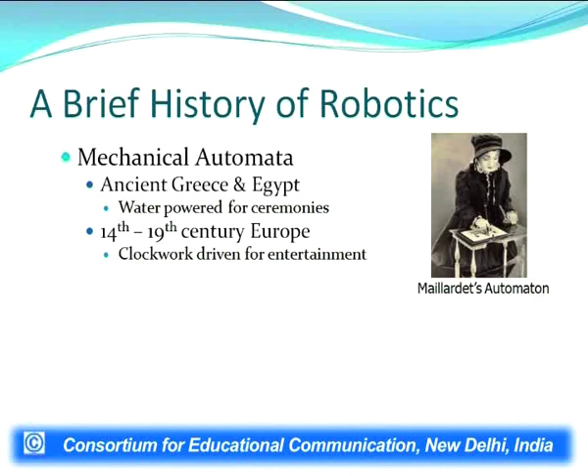Now let us start with a brief history of robotics. Mechanical automata in ancient Greece and Egypt, water powered, for ceremonies. From the 14th to 19th century in Europe, clockwork driven, for entertainment. Motor driven robotics: in 1928, the first motor driven automata. In 1961, Unimate, the first industrial robot. In 1967, Shakey, the autonomous mobile research robot. In 1969, the Stanford Arm, a dexterous electric motor driven robot arm.

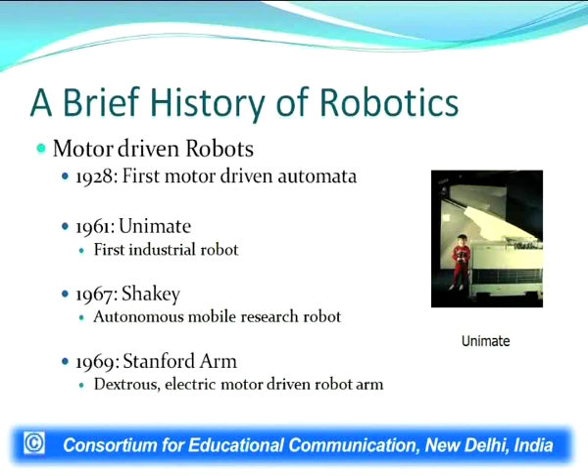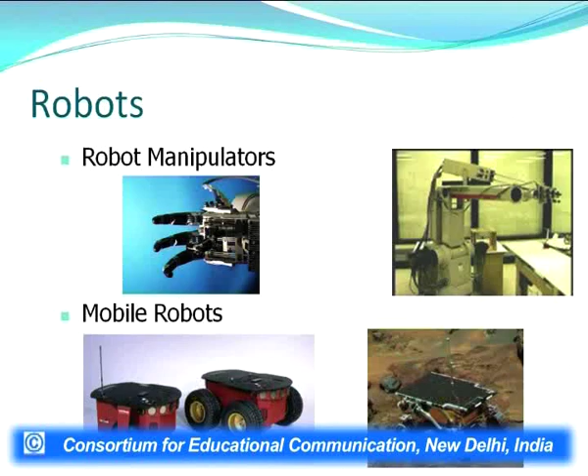You can see the robot manipulators and mobile robots. These are basically machines governed by programs and controlled by the instructions which have been fed into them. Walking robots; you can see here humanoid robots. These robots have been made using different parts and articles, and they have been fitted with the programs and the instructions.

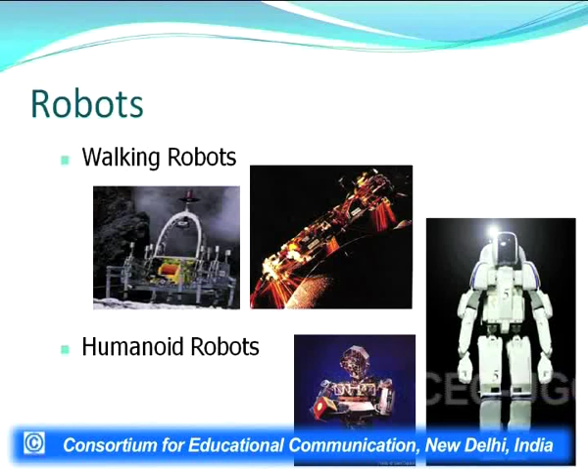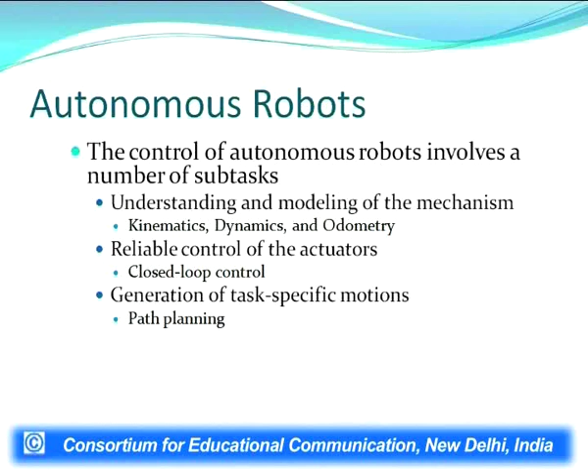Autonomous robots. The control of autonomous robots involves a number of subtasks: understanding and modeling of the mechanism, kinematics, dynamics and odometry; reliable control of actuators, closed loop control; generation of task specific motions, that is, path planning.

Autonomous robots: the integration of sensors, selection and interfacing of various types of sensors, coping with noise and uncertainty, filtering of sensor noise and actuator uncertainty, creation of flexible control policies. Control has to deal with new situations.

Traditional industrial robots. Traditional industrial robot control uses robot arms and largely pre-computed motions, programmable using a teach box, repetitive tasks, high speed, few sensing operations, high precision movements, pre-planned trajectories and task policies. No interaction with humans.

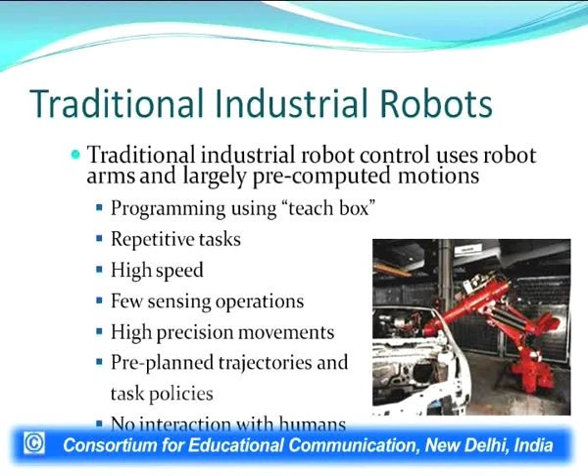Problems. Traditional programming techniques for industrial robots lack key capabilities necessary in intelligent environments. Only limited online sensing, no incorporation of uncertainty, no interaction with humans, reliance on perfect task information, complete reprogramming for a new task.

Requirements for robots in intelligent environments. Autonomy: robots have to be capable of achieving task objectives without human input. Robots have to be able to make and execute their own decisions based on sensor information.

Requirements for robots in intelligent environments. Intuitive human-robot interface: use of robots in smart homes cannot require extensive user training. Commands to robots should be natural for inhabitants. Adaptation: robots have to be able to adjust to changes in the environment.

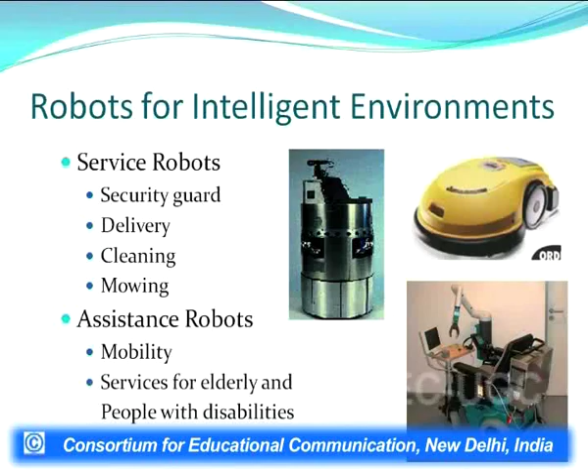You can see here the robots for intelligent environments: service robots for security guard, delivery, cleaning, mowing; assistance robots for mobility, and service for elderly and people with disability. As you may know, different kinds of robots are now available for service purposes. You can even use a robot at the door to see who is coming to your house, and it will easily understand which kind of person is there and inform you accordingly.

In the same way, for security purposes also, a robot can now be used very easily. For this you need not have any special kind of training. These robots are already trained regarding security and so on. Likewise, in cleaning and other tasks, these robots are being used for cleaning sophisticated types of equipment. Otherwise also, these robots are so trained that they can assist you in different areas.

Autonomous robot control. To control robots to perform tasks autonomously, a number of tasks have to be addressed: modeling of robot mechanism, kinematics, dynamics; robot sensor selection, active and passive proximity sensors; low level controls of actuators, closed loop control; control architectures, traditional planning architectures, behavior based control architectures, hybrid architectures.

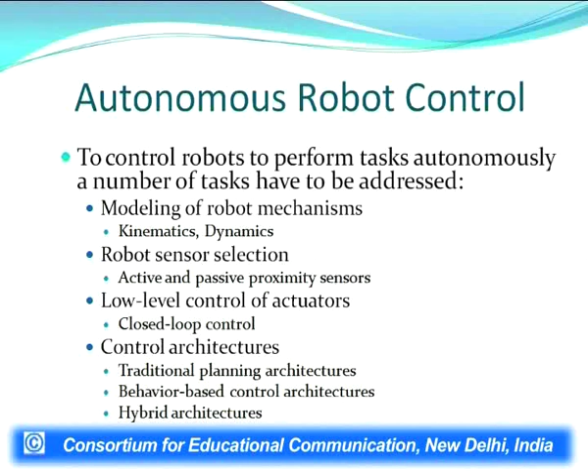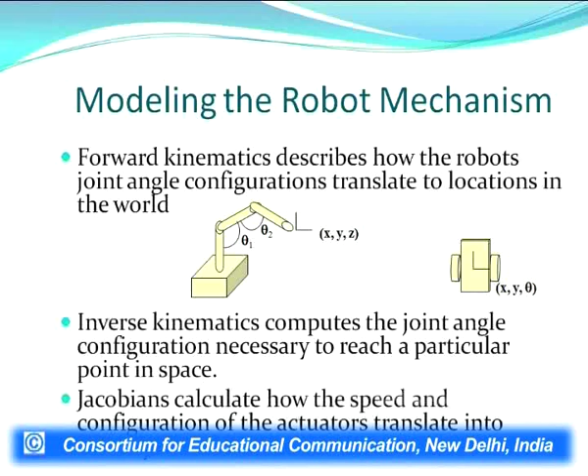Modeling the robot mechanism. Forward kinematics describes how the robot joint angle configurations translate to locations in the world. You can see here in the pictures the dimensions, how the arms have been fixed up. Inverse kinematics computes the joint angle configuration necessary to reach a particular point in space. Jacobians calculate how the speed and configuration of the actuators translate into velocity of the robot.

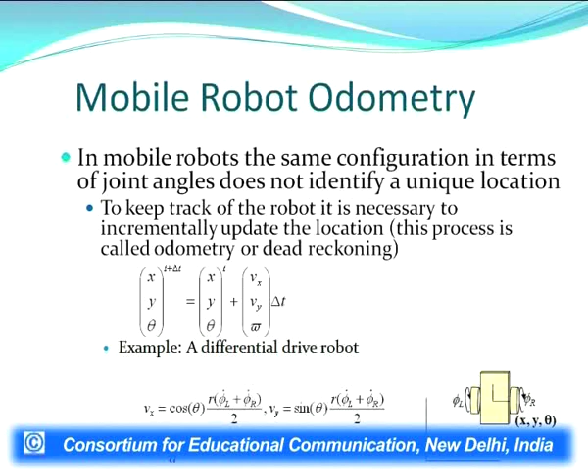Mobile robot odometry. In mobile robots, the same configuration in terms of joint angles does not identify a unique location. To keep track of the robot, it is necessary to incrementally update the location. This process is called odometry or dead reckoning. Here you can see the mathematical equations for a differential drive robot, and how these equations will take place.

Actuator control. To get a particular robot actuator to a particular location, it is important to apply the correct amount of force or torque to it. This requires knowledge of the dynamics of the robot: mass, inertia, friction. For a simplistic mobile robot, F = ma + Bv. Frequently, actuators are treated as if they were independent, as if moving one joint would not affect any of the other joints.

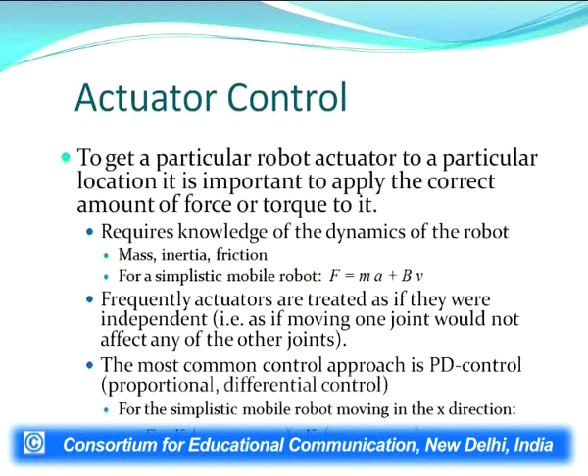The most common control approach is PD control, proportional and derivative control. For the simplistic mobile robot moving in the x direction, as we have mentioned, F = Kp(x desired - x actual) + Kd(v desired - v actual).

Robot navigation. Path planning addresses the task of computing a trajectory for the robot such that it reaches the desired goal without colliding with obstacles. Optimal paths are hard to compute, in particular for robots that cannot move in arbitrary directions, such as non-holonomic robots. Shortest distance paths can be dangerous since they always graze obstacles. Paths for robot arms have to take into account the entire robot, not only the end effector.

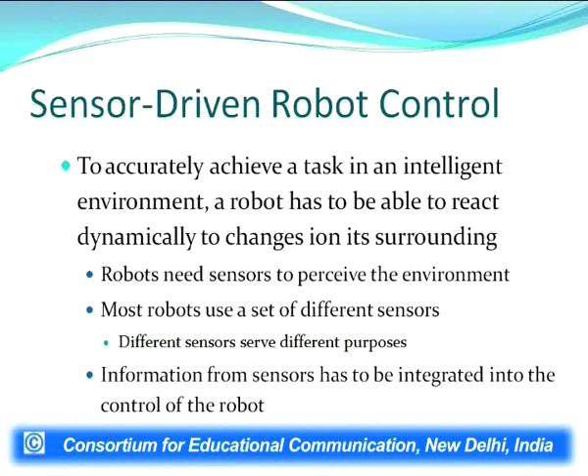Sensor driven robot control. To accurately achieve a task in an intelligent environment, a robot has to be able to react dynamically to changes in its surroundings. Robots need sensors to perceive the environment. Most robots use a set of different sensors. Different sensors serve different purposes. Information from sensors has to be integrated into the control of robots.

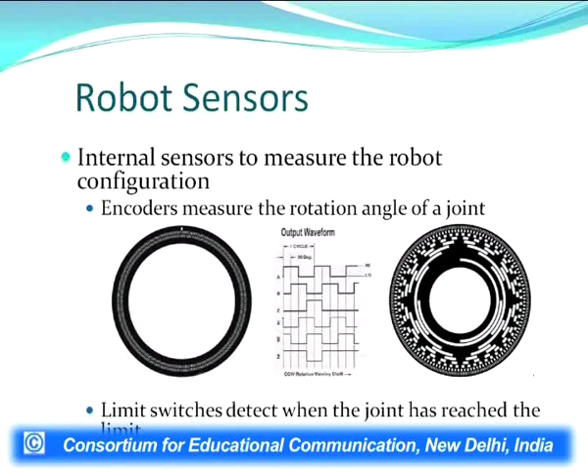Robot sensors. Internal sensors measure the robot configuration. Encoders measure the rotation angle of a joint. Here you can see how the output waveforms are coming in. Limit switches detect when the joint has reached the limit.

Robot sensors. Proximity sensors are used to measure the distance or location of objects in the environment. This can then be used to determine the location of the robot. Infrared sensors determine the distance to an object by measuring the amount of infrared light an object reflects back to the robot. Ultrasonic sensors, sonars, measure the time that an ultrasonic signal takes until it returns to the robot.

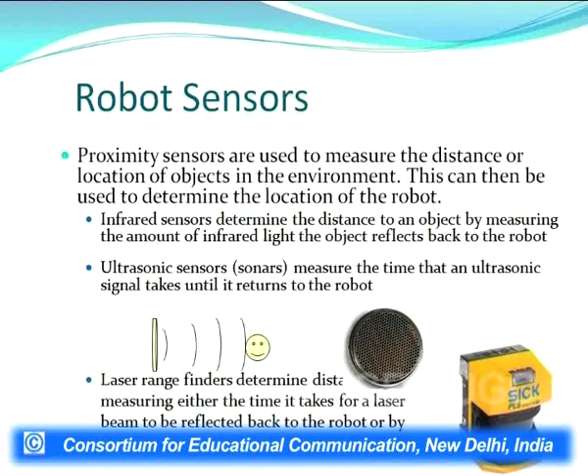Laser range finders determine the distance by measuring either the time it takes for a laser beam to be reflected back to the robot, or by measuring where the laser hits the object. You can see here the different sensors.

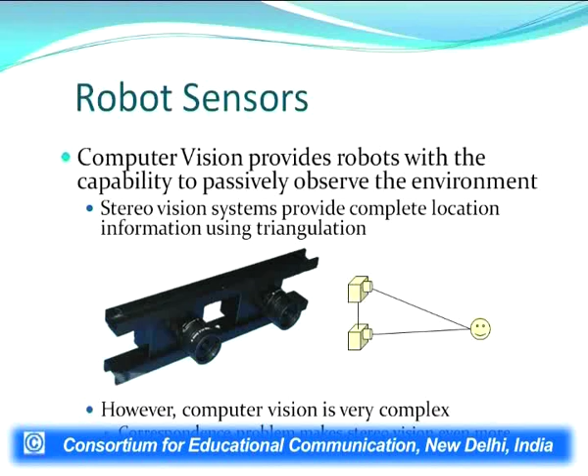Robot sensors. Computer vision provides robots with the capability to passively observe the environment. Stereo vision systems provide complete location information using triangulation. However, computer vision is very complex. The correspondence problem makes stereo vision even more difficult.

Uncertainty in robot systems. Robot systems in intelligent environments have to deal with sensor noise and uncertainty. Sensor uncertainty: sensor readings are imprecise and unreliable. Non-observability: various aspects of the environment cannot be observed. The environment is initially unknown. Action uncertainty: actions can fail. Actions have non-deterministic outcomes.

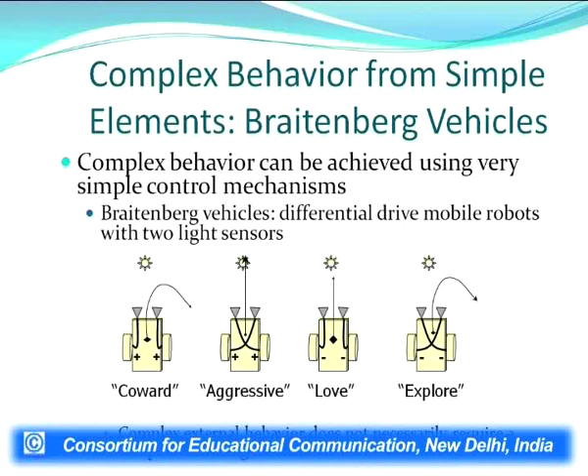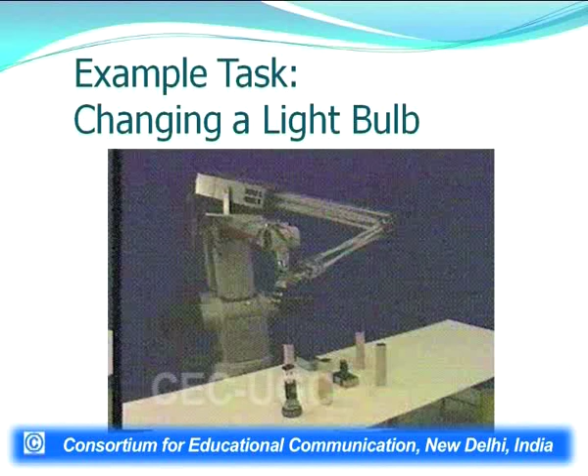Hybrid control architecture. Advantages: permits goal based strategies, ensures fast reactions to unexpected changes, reduces complexity of planning. Problems: choice of behaviors limits range of possible tasks. Behavior interactions have to be well modeled to be able to form the plans.

Traditional human robot interface, teleoperation, remote teleoperation, direct operation of the robot by the user. User uses a 3D joystick or an exoskeleton to drive the robot. Simple to install, removes user from dangerous areas. Problems: require insight into the mechanism, can be exhausting, easily leads to operation errors.

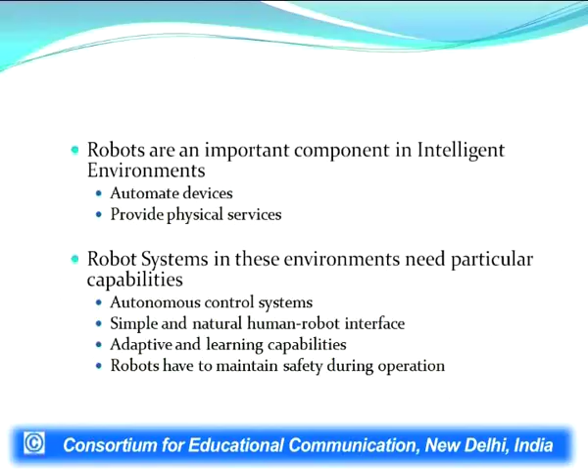Robot systems in these environments need particular capabilities: autonomous control system, simple and natural human robot interface, adaptive and learning capabilities. Robot has to maintain safety during operations. While a number of techniques to address these requirements exist, no fully satisfactory solutions have yet been developed. Only very simple robots for single tasks in intelligent environments exist.